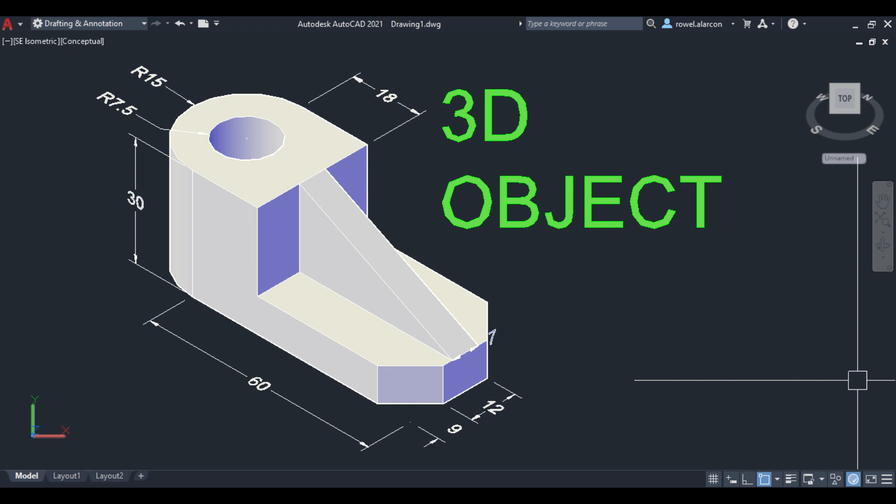Okay, first let's analyze our object. From this point or area, it has a diameter of 30. From the center of our isocircle, it has a distance of 18.

Okay, so line, specify first point. Make sure your ortho mode is on, or press F8. Okay, then our distance is 15.

Our diameter is 30, so divide to 15, plus 18. This is from the midpoint, so it's equal to 33.

So line, 33, and our width is 30, then 33, then close.

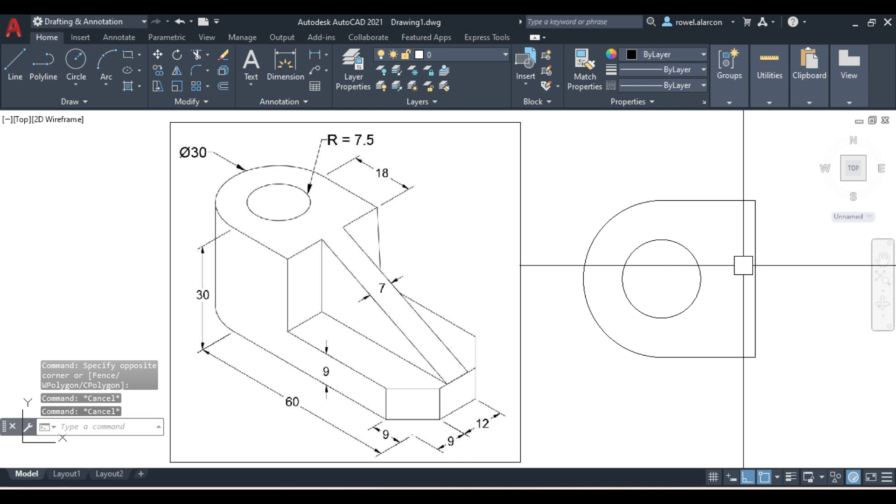Okay, next is this part. This part has a distance of 60. So from this part, 18, so 60 minus 18 is 42.

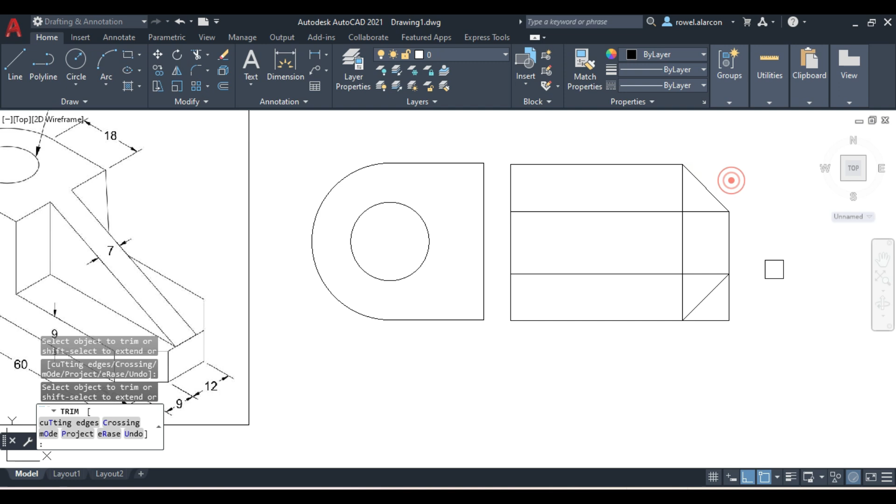Okay, then this, erase it.

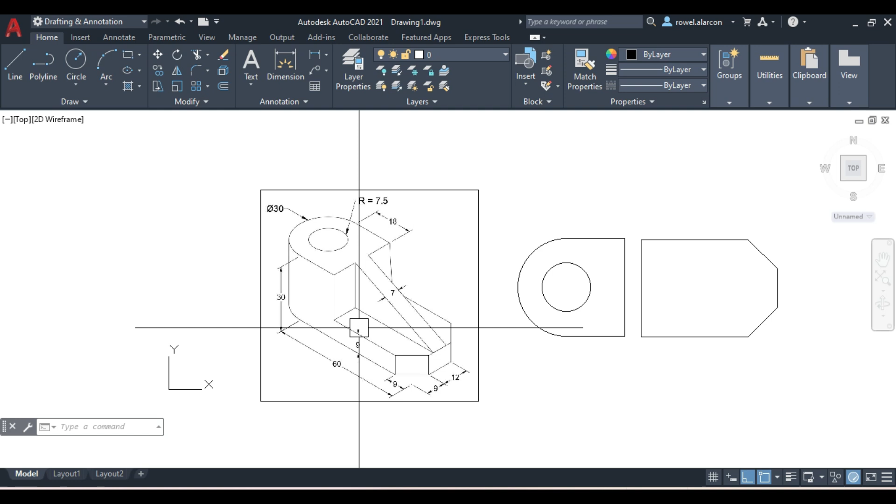Next, let's add height to this. The height is 30 for this part, and 9 for this part.

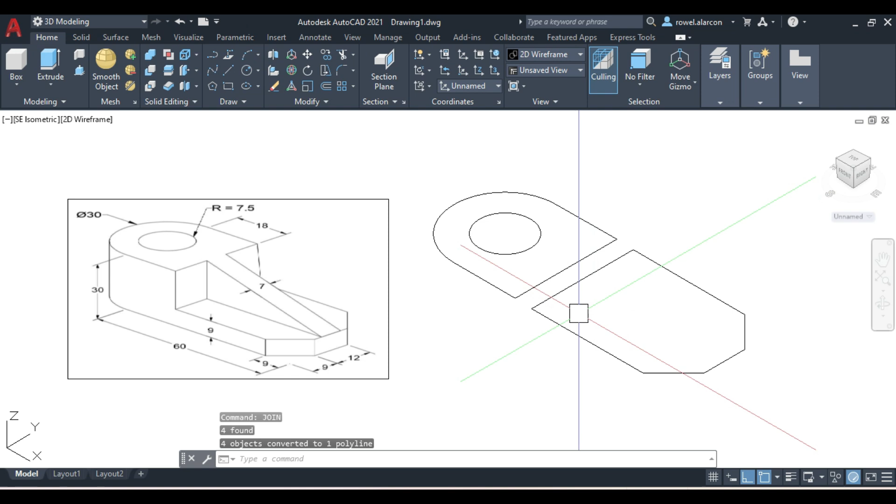Okay, the ribbon has changed compared to drafting and annotation earlier. So before I extrude or add height, I'll first join this. Okay, join.

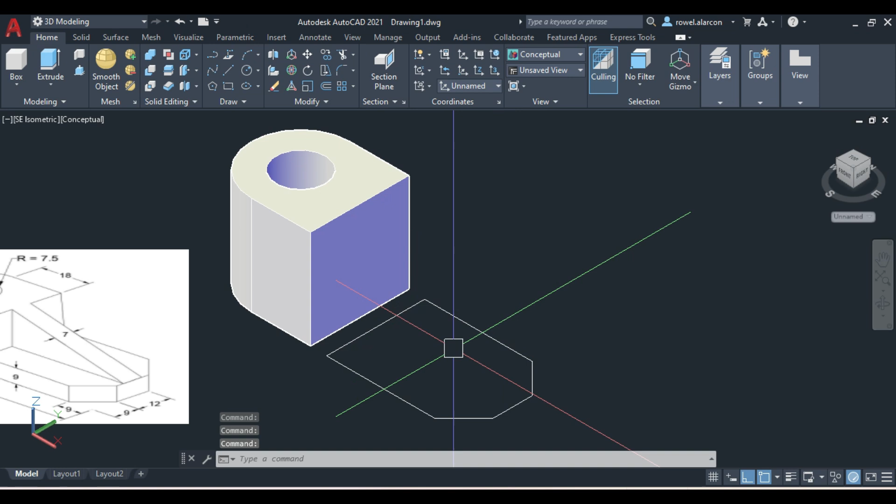Next is this part. It has a height of 9. So extrude, 9.

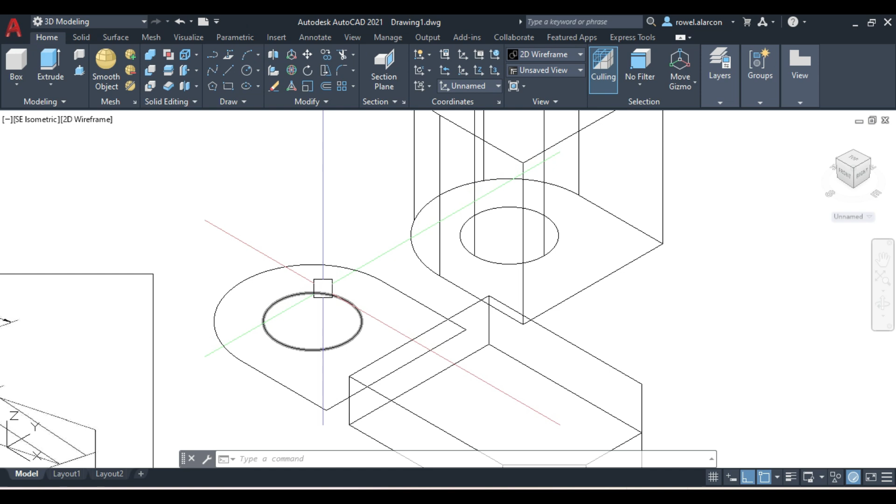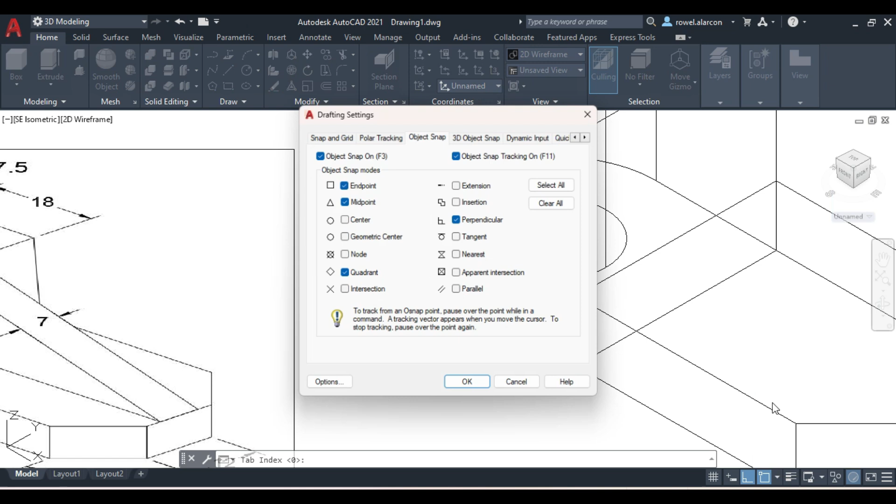Next is this part. Make sure object snap tracking is on, or F11, and perpendicular is checked in your object snap modes.

So line, specify first point, just hover over the midpoint. There, so we have, point your cursor here on the green broken line.

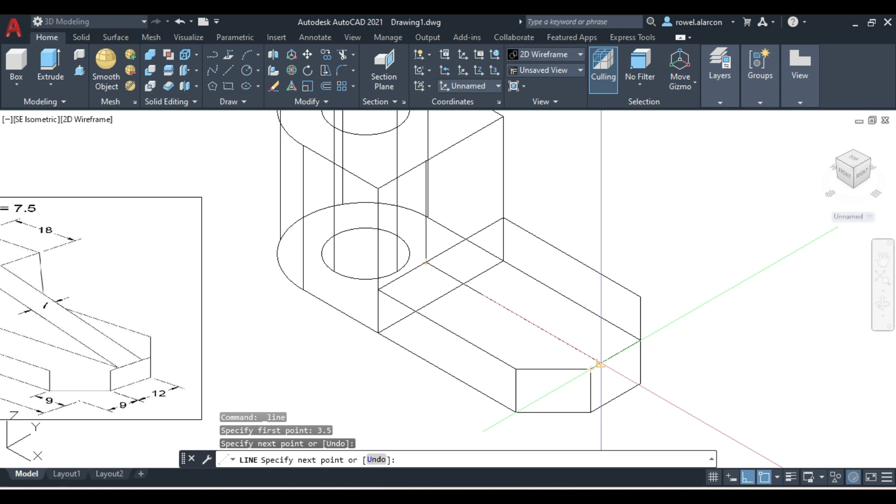3.5. Okay, then going down, so you can detect the perpendicular. Then click, then on this side.

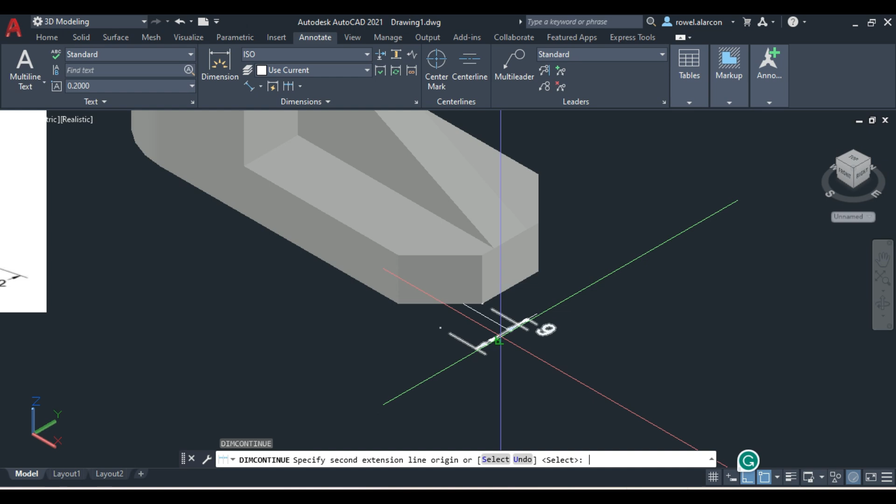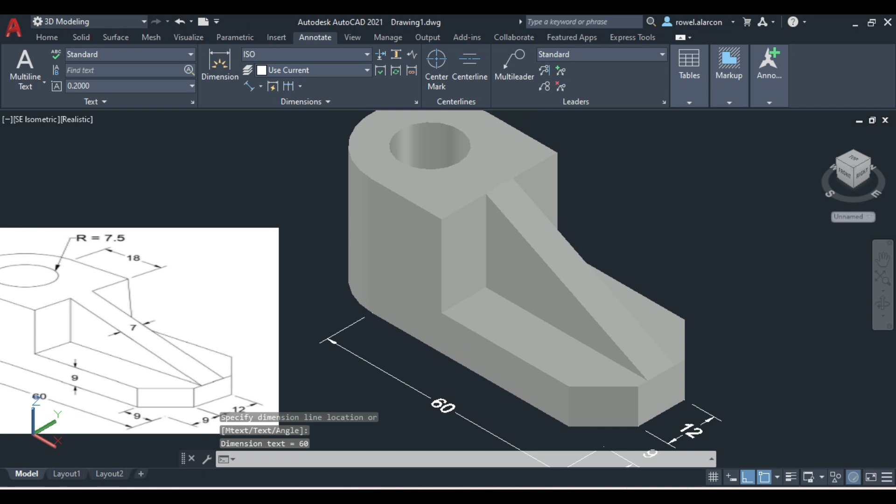Next, second part. So align.

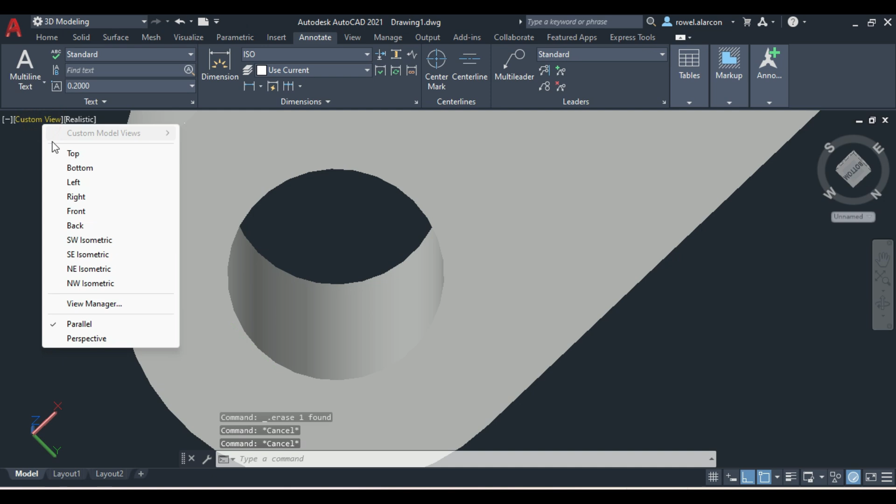Next is changing the face. So click for the coordinates, click the face, then this, then enter.

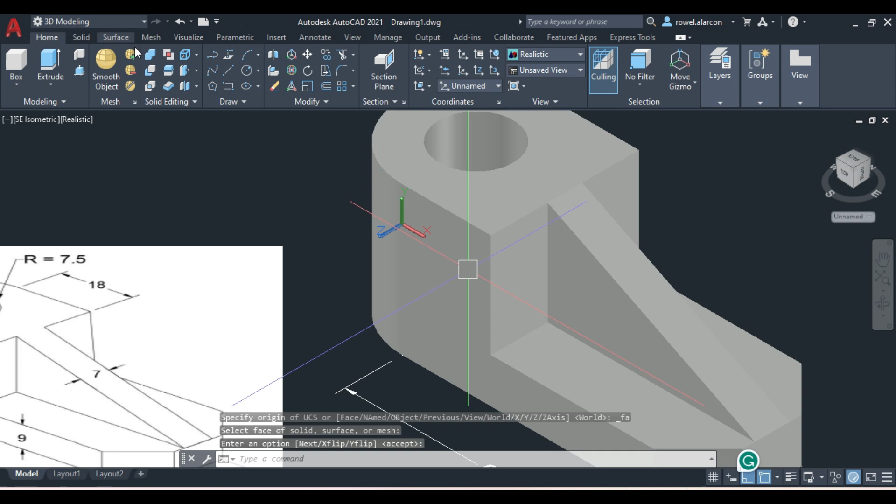Then annotate. There, for this part or this area.

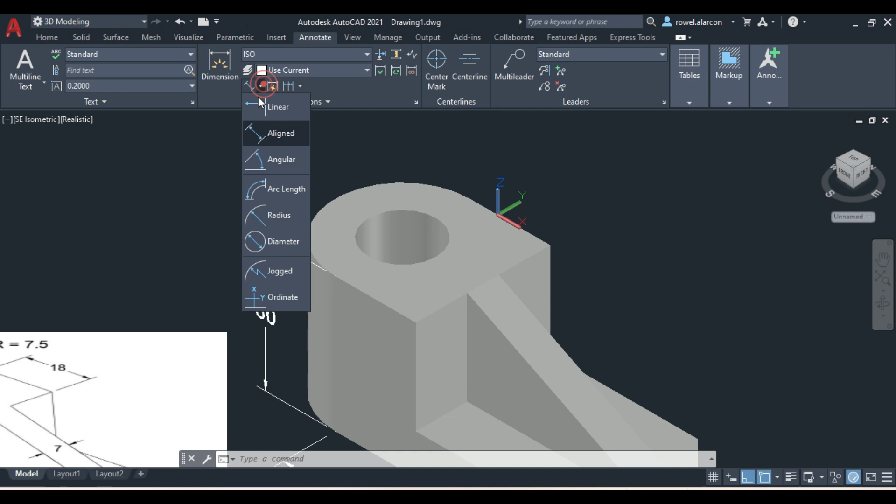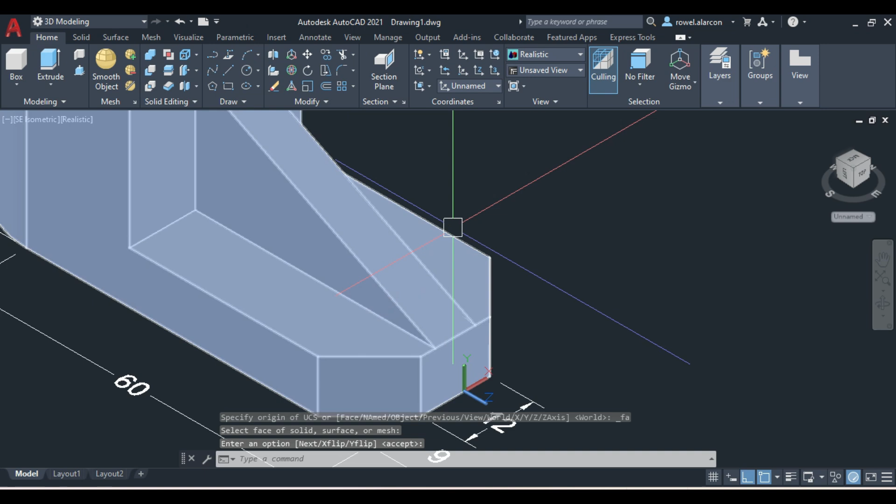Then annotate. There, okay, for this part now, so home, then face, this part, then enter, okay, there.

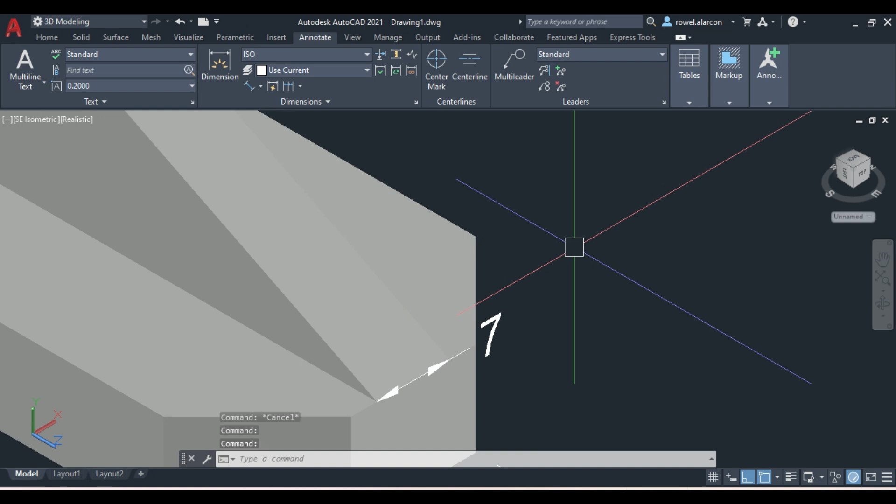Next is this part. Then annotate.

Okay good, then next is this.

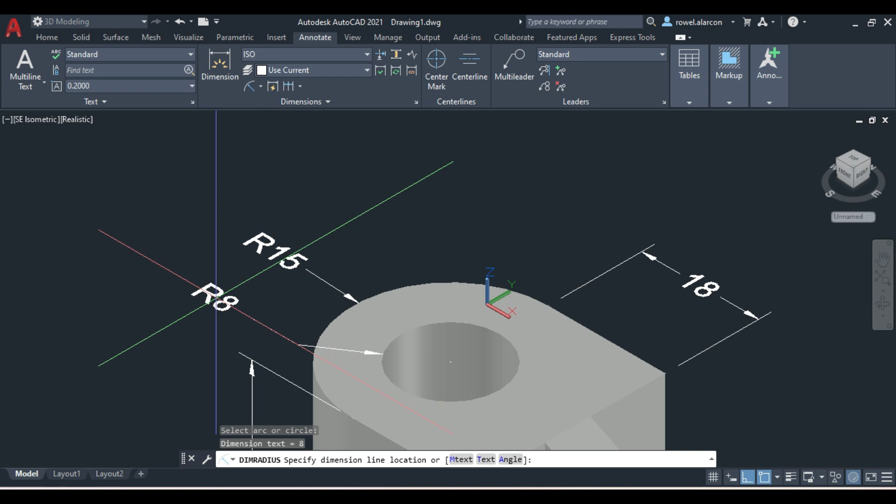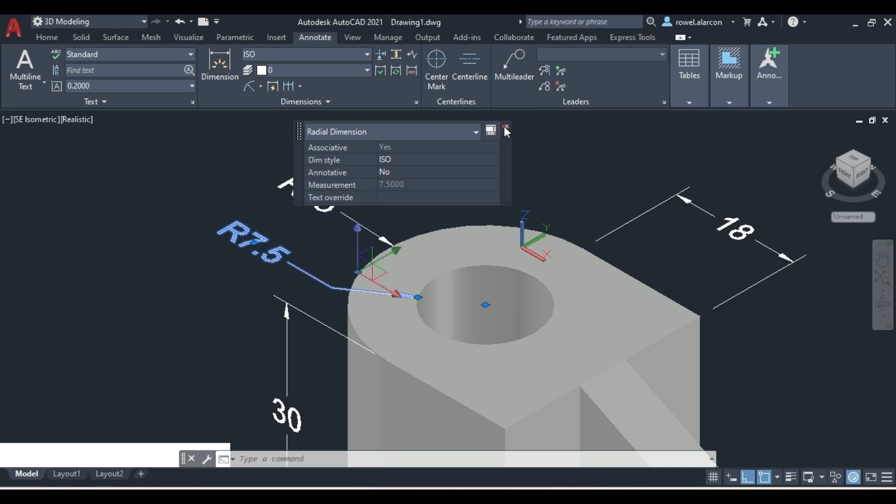Let's change the precision of the inner circle. So properties, then let's set the precision to 1 decimal place. Then okay.